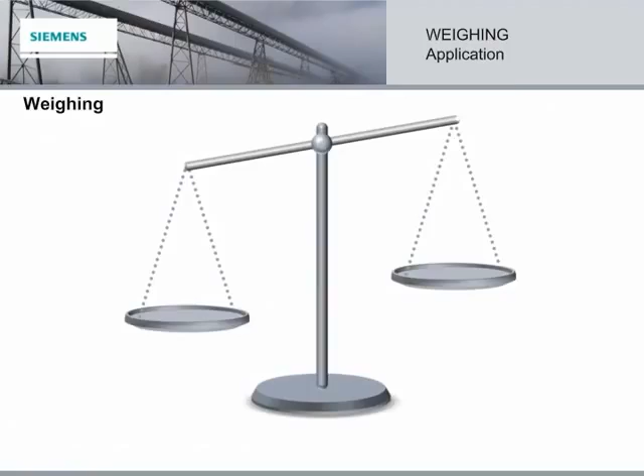Siemens provides solutions by offering the most comprehensive product range, and it is the only process instrumentation company to include weighing in its portfolio.

Our weighing family includes conveyor belt scales, weight feeders, solids flow meters, integrators, speed sensors, PLC modules, and our field-proven load cells.

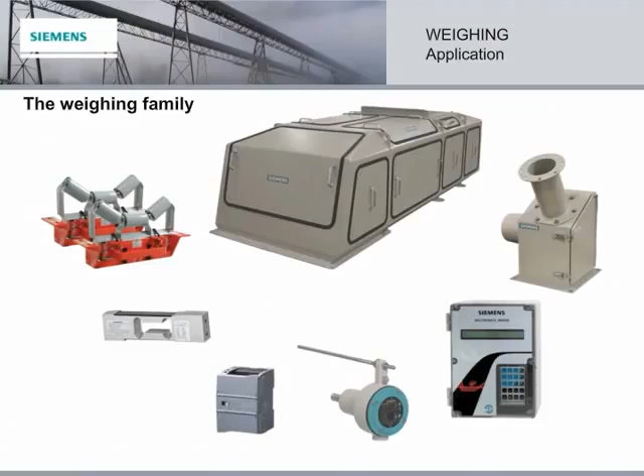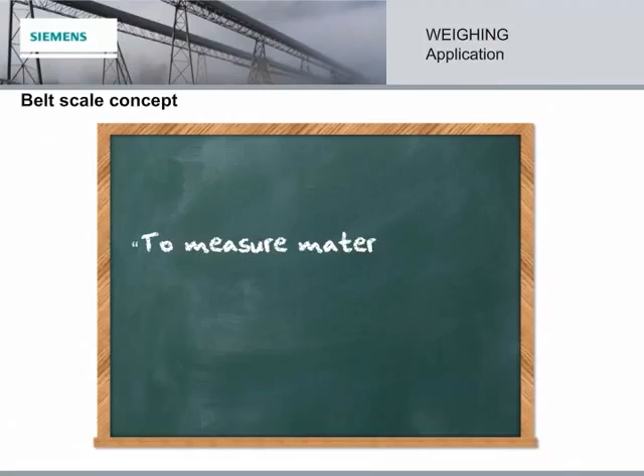In this module, we focus on our belt scales. The fundamental concept of belt scale technology is to measure material without interruption or disruption to the flow. I've asked Henry to break down some belt scale basics for us, but I'll be back in a bit.

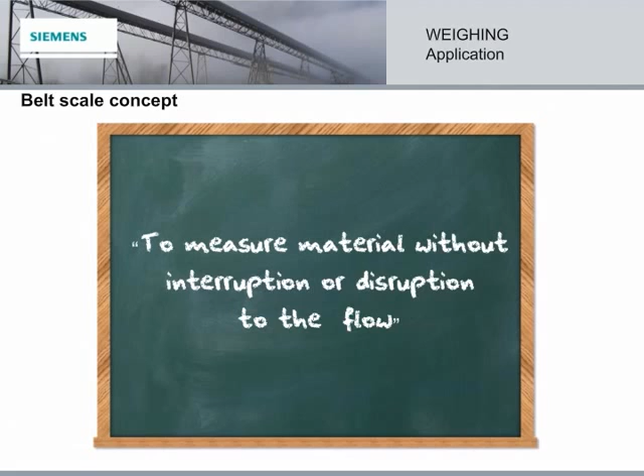Thank you, Stephanie. Hi, my name is Henry, and I'm here to talk to you about belt scale systems. A belt scale system monitors the flow of material and calculates the amount of product produced per unit of time.

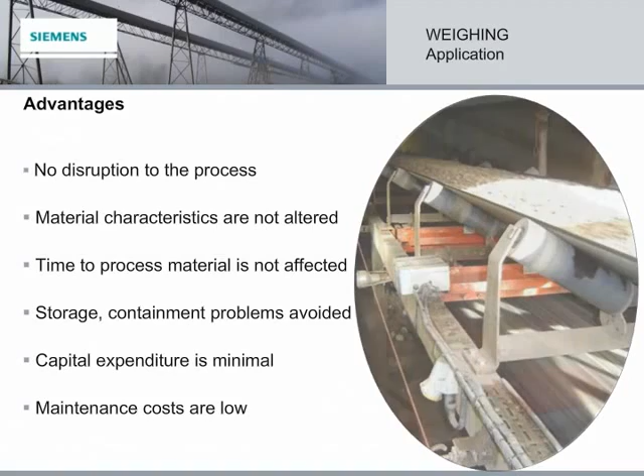There are many advantages to continuous belt weighing. The process is not disturbed. Neither the material characteristics nor the time to process the material are affected. Storage and containment problems are avoided. Capital expenditure is minimal, and maintenance costs are low.

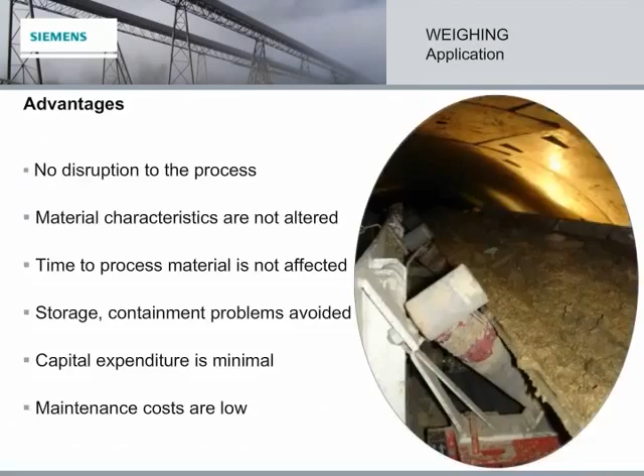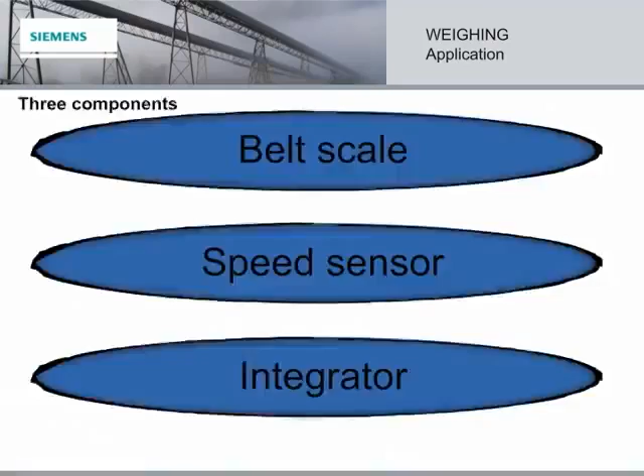The three essential components of a belt scale system are the belt scale, the speed sensor, and the integrator. So let's look at how these three components fit together to make up a belt scale system.

First, the belt scale is located here, under an idler and the conveyor belt that carries the material load. When the load crosses the idler, the weight creates a deflection in the belt scale load cells.

Second is the speed sensor. It provides a signal proportional to belt speed, and the overall system accuracy depends on a consistent speed signal.

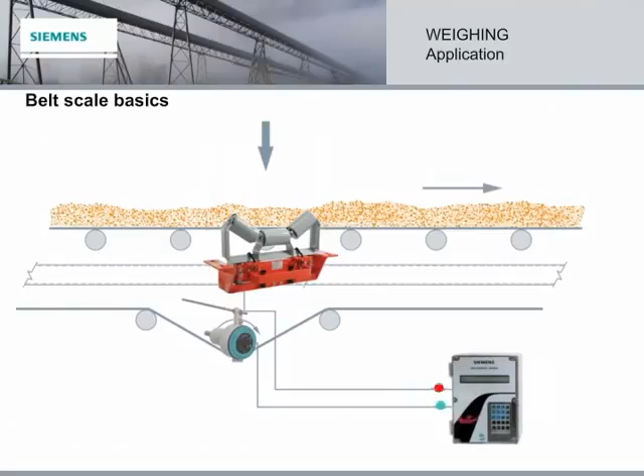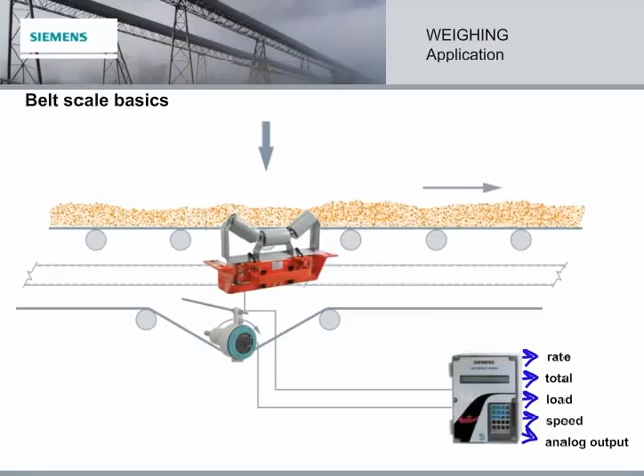And third, the load cell and the speed sensor signals are sent to the integrator, which calculates the information and puts out rate, total, load, speed, analog output, and remote total output.

So those are the basics. Now let's look at each of the three components of the belt scale system in more detail. We'll start by getting Henry to tell us more about belt scales.

Our belt scale family includes scales varying in cost and performance. Each has its purpose, based on the specific engineering requirements of an application.

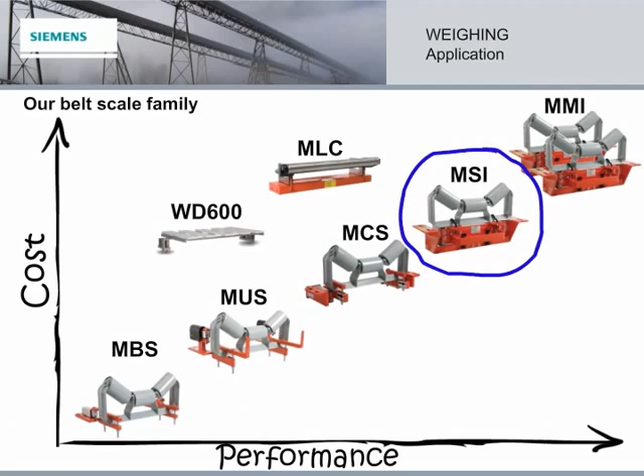Now today, we're going to focus in on one belt scale in particular, the top choice for the majority of applications in most industries.

This is the Milltronics Single Idler Scale, also known as the MSI. It is the shining star of Siemens dynamic weighing. Its unique design, rugged compatibilities, ease of use, and dependable performance has placed it at the top of the weighing line since 1984, when it was first designed.

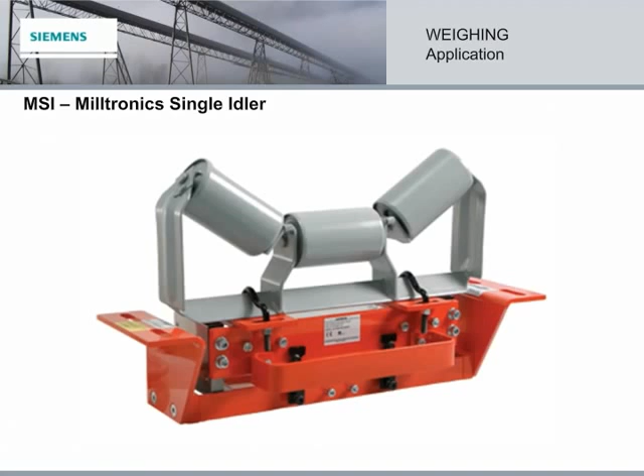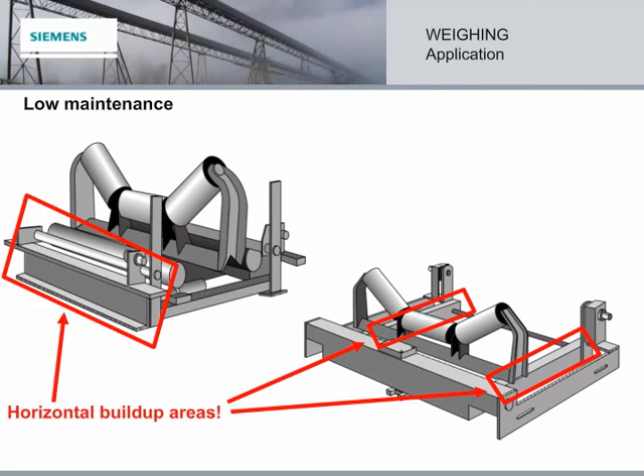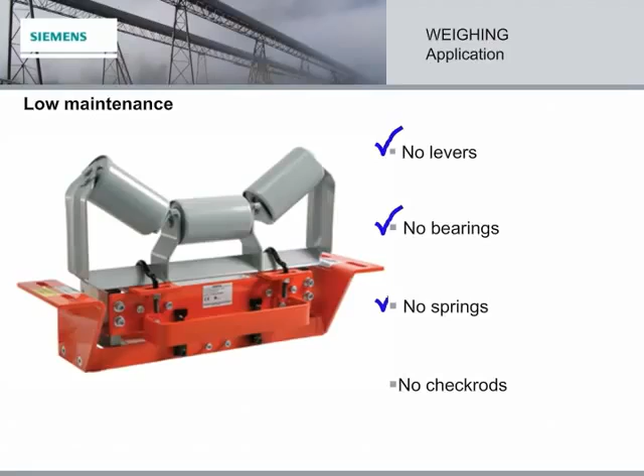A lot of belt scales on the market have multiple points that require maintenance, as well as having horizontal areas where material builds up, which affects accuracy. Not the MSI. It has none of these points. Plus, it's designed with minimal opportunities for buildup. Altogether, that equals low maintenance.

Using two or more MSI belt scales in tandem creates the Milltronics multi-idler system, providing the advantages of the MSI and the benefits of additional weighing idlers.

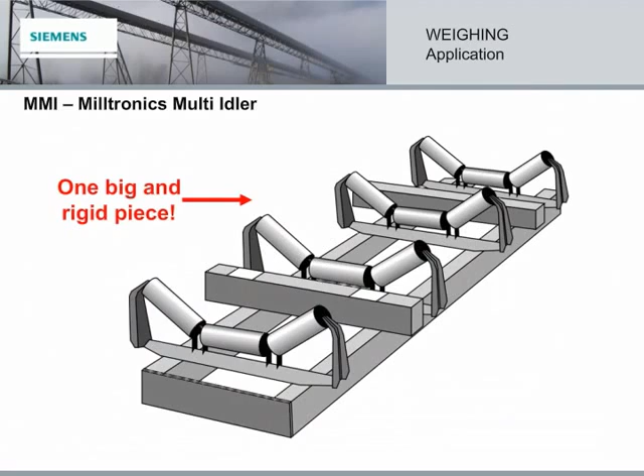The MSIs together make for a system which is far better than the common industry multi-idler system that is one big rigid piece. The installation of these rigid systems often requires the use of cranes or other high-cost resources.

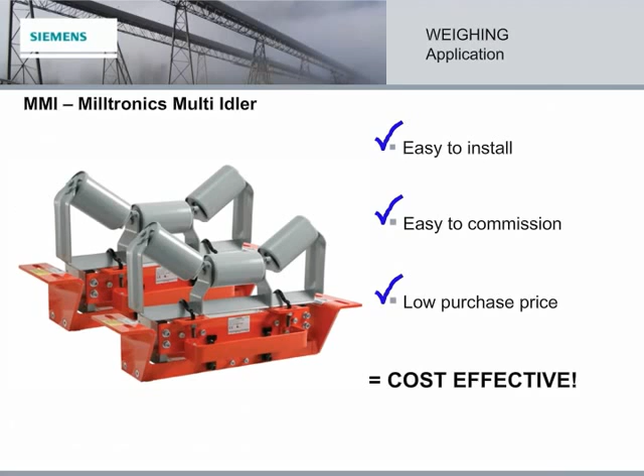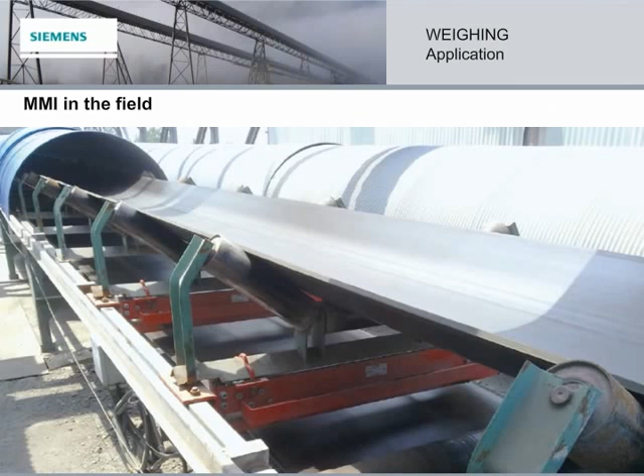Here the MMI performs in the field. Here the Milltronics multi-idler, or MMI, performs in the field.

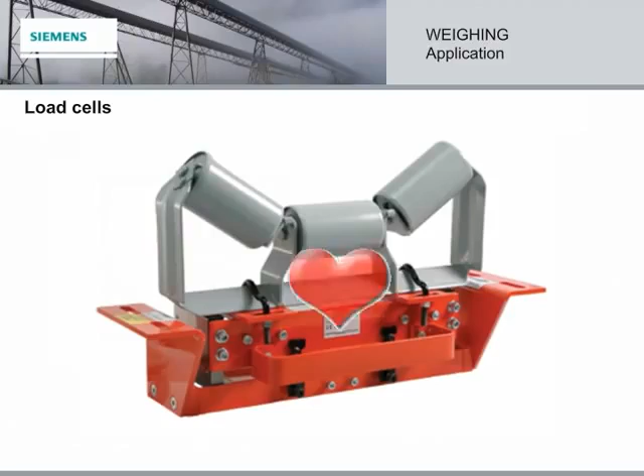The heart of all weighing systems is the load cells. In MSI belt scales, the weight is applied directly on the load cells so that the reaction time is instantaneous, providing unparalleled accuracy. Our load cells have triple beam parallelogram construction and do not react to horizontal forces.

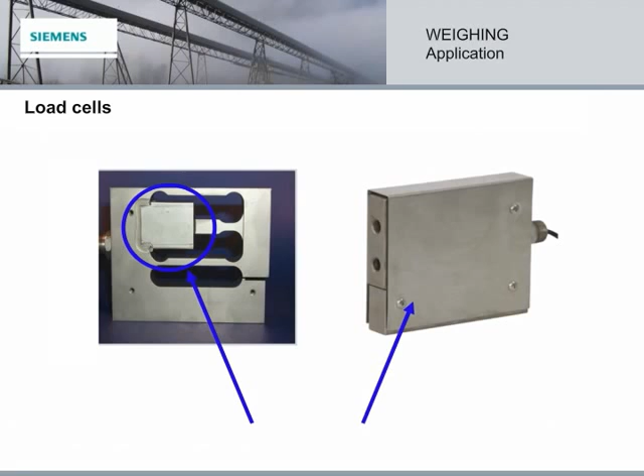They are corrosion resistant, have dual protection with an inner block, and have an outer cover which allows them to perform under harsh conditions. They also have an integrated overload stop that never needs to be adjusted. Then there is the 150% linear output and the built-in 300% overload capacity.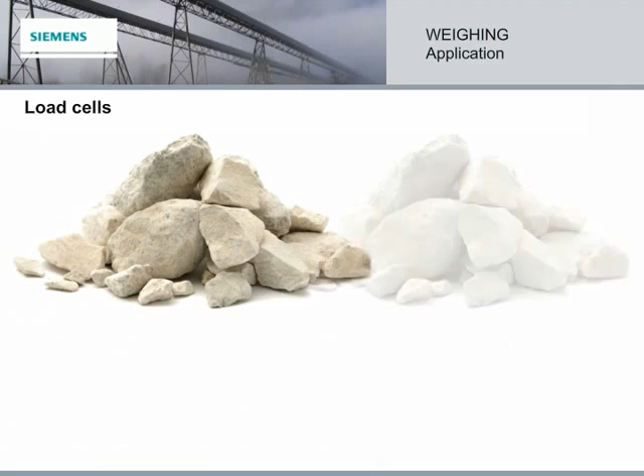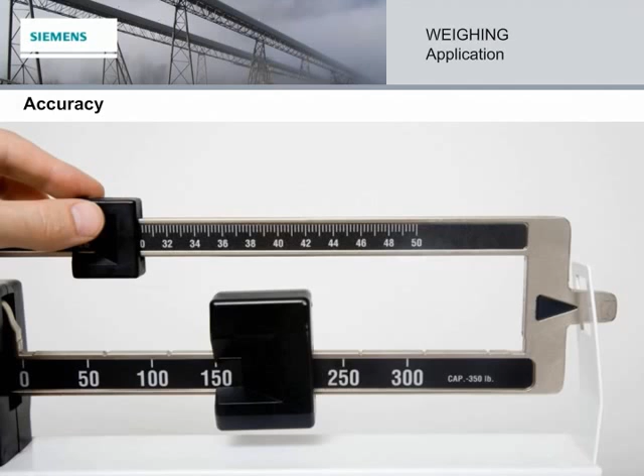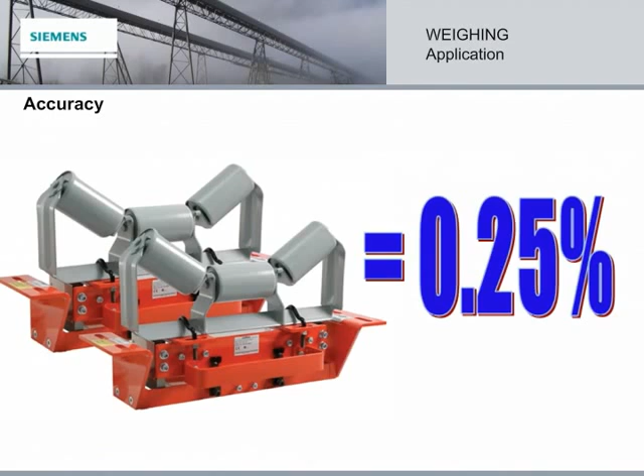When it comes to scales, high accuracy is at the forefront, and our Siemens scales do not disappoint. Use the MSI for 0.5% accuracy or better, the MMI2 for 0.25%, and the MMI3 for accuracy up to 0.125%.

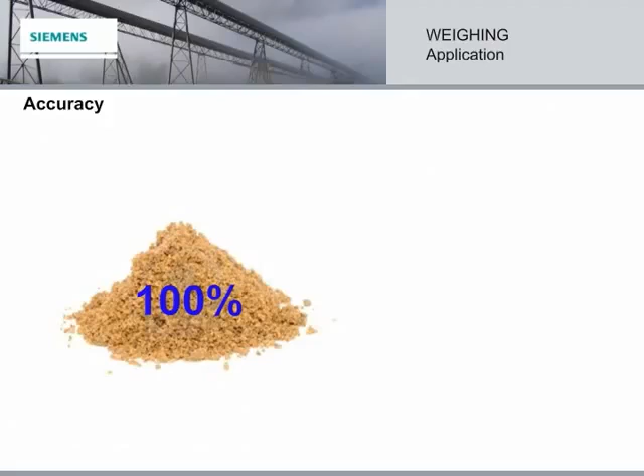Most belt scales need to be running at full scale in order to give this kind of accuracy. Let's face it, it's not possible for all applications to run at full scale all the time, so why sacrifice accuracy? Our belt scales give you this accuracy from 100% all the way down to 20%.

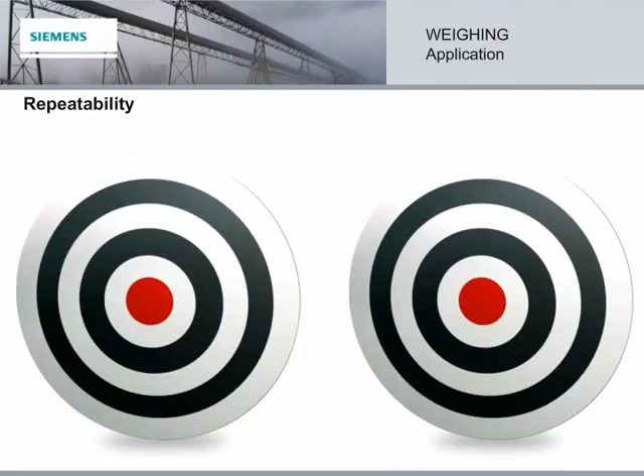You can't have accuracy without repeatability. Results that are inconsistent can cost time and money. Repeatability means the same results every time, results that you can count on.

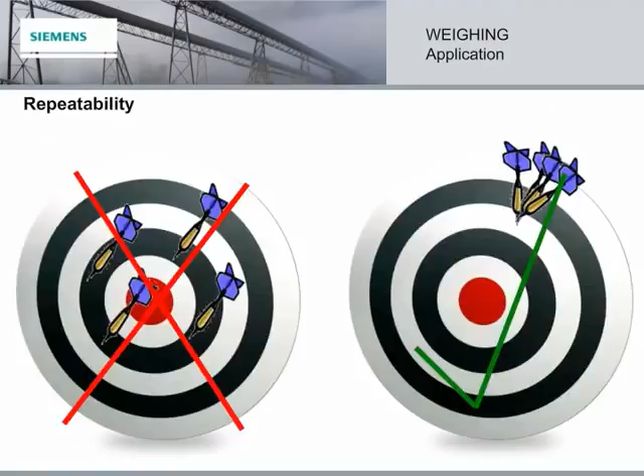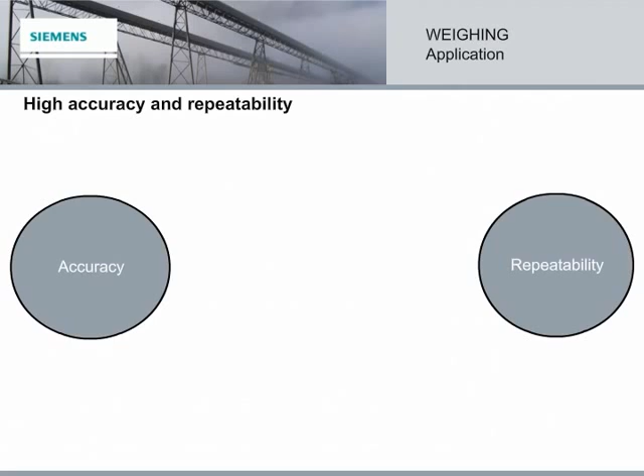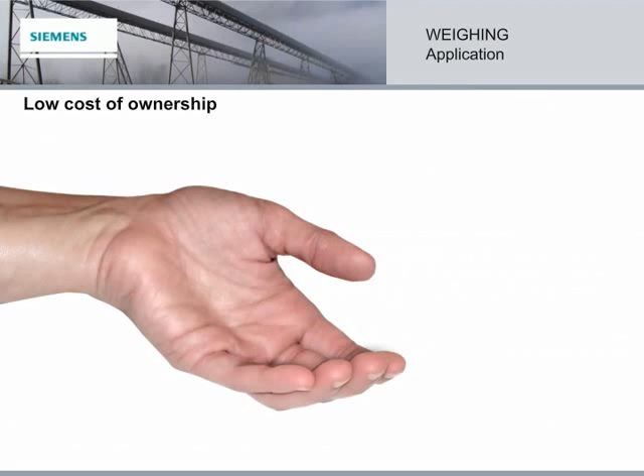Accuracy is crucial, but repeatability is also important to trade, as it provides confidence in the measurement. With Siemens belt scales, you get high accuracy and repeatability. All of these features ensure the MSI and the MMI have an extremely low cost of ownership, allowing the customer to keep more money in hand.

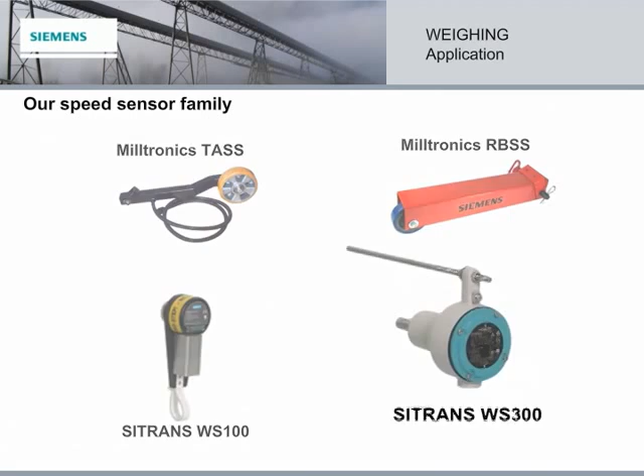Now that we've learned about belt scales, let's get Henry to tell us more about the speed sensor component of the belt scale system. Here is our speed sensor family, all of them top performers. And for today, we're going to focus on the SITRANS WS300.

The SITRANS WS300 is suitable for low, high, or varying shaft speeds. It is bidirectional for clockwise or anti-clockwise shaft rotation, and its small size allows it to be installed in applications that are tight on space. These features, combined with its low purchase price, make it the speed sensor of choice.

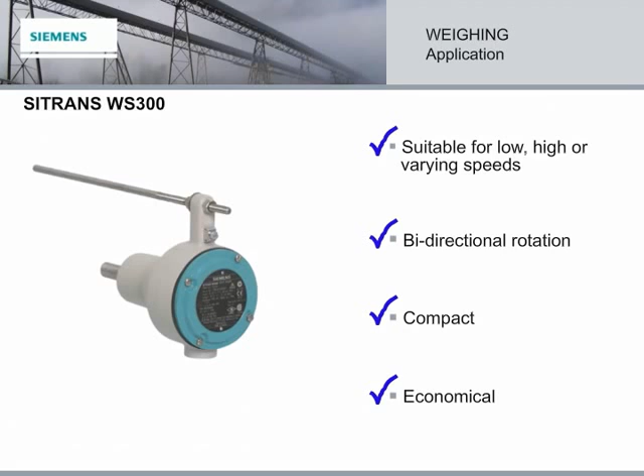The speed sensor is just as crucial as the belt scale for accurate and repeatable results. There's one more component for Henry to tell us about, the brains of the belt scale system, the integrator.

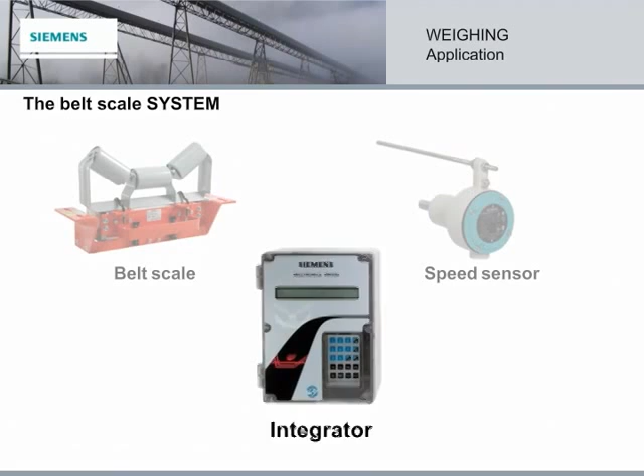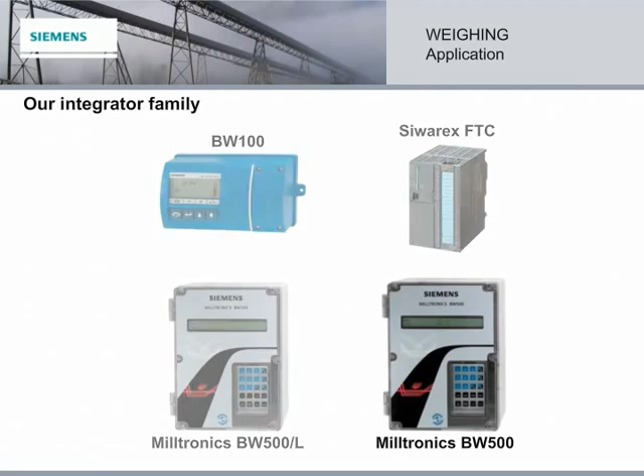Meet the integrator family. Each has been tried, tested, and proven in the field with a multitude of applications. Now we're going to focus on the king of the integrators, the Milltronics BW500.

The Milltronics BW500 performs sophisticated measurement and flow control functions such as these: differential speed detection and batching, incline and moisture inputs, online calibration, multiple feed conditions and/or material, and 5 programmable multifunction alarm relays.

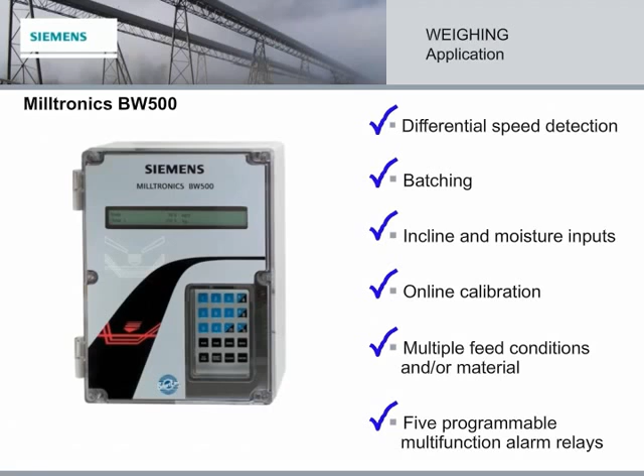The BW500 is where it all comes together, providing the exact results required from a belt scale system.

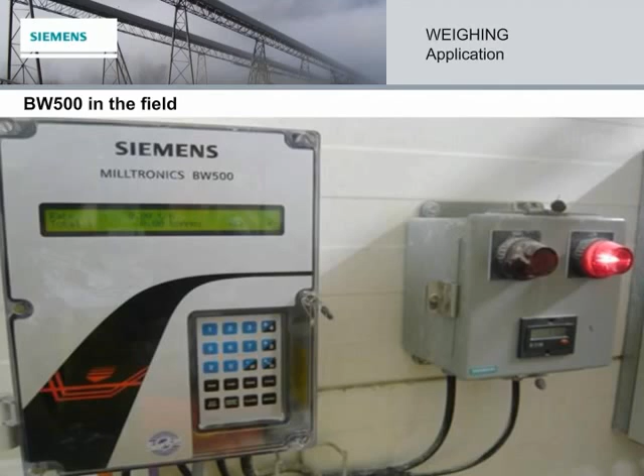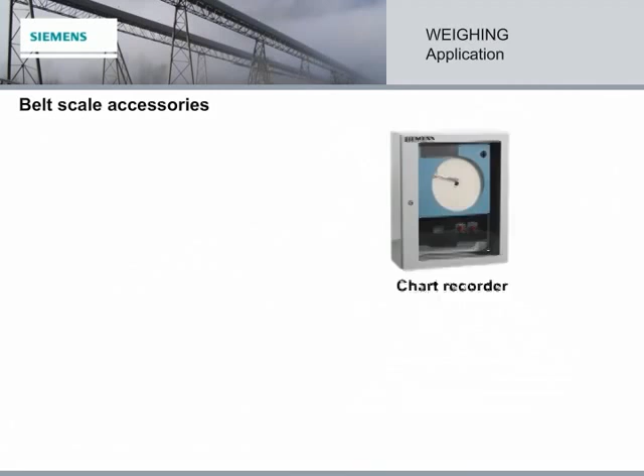Siemens offers a full range of belt scale accessories that make installation, control, and calibration easy. These include chart recorders, printers, remote totalizers, inclinometers, test chains, and reels for dynamic calibration.

And then there's the MWL, the weight lifter for static calibration. It allows the operator to stay away from the conveyor belt, eliminating safety concerns.

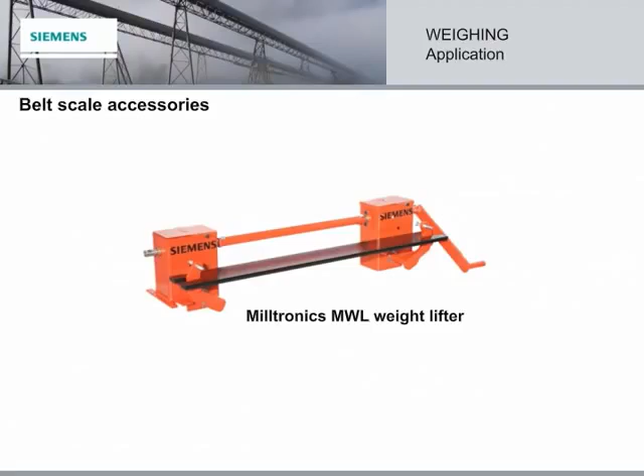Not only are our belt scales easy to install, but we also provide an application guide, as well as expert technical support to make it even easier. As with any instrumentation, proper installation is the key for top performance.

We have USDA and FDA options for food approvals. In hazardous, we have CSA, FM, ATEX, IECEx, and GOST-RX. And in trade, we have Measurement Canada, NTEP, MID and OIML, CMC, SABS, and GOST-M.

As you can see, Siemens is certified excellence. And now, I'll hand you back to Stephanie. Thanks for listening.

Thanks, Henry. After learning how Milltronics belt scales from Siemens combine simple drop-in installation, low maintenance, and repeatable accuracy, it's no surprise that there are tens of thousands installed on applications worldwide.